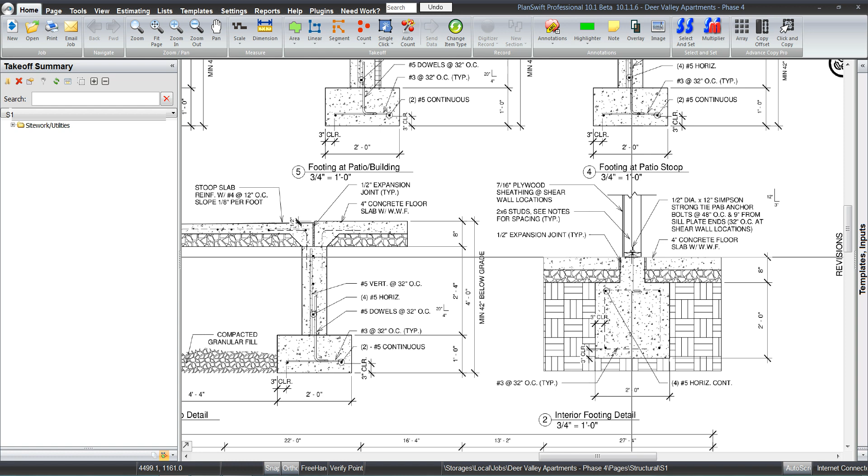So I thought we'd go ahead and go through this one for those of you who have just started out with PlanSwift or just got the plugin. There's quite a few of you, I know, so we'll just go ahead and start with that.

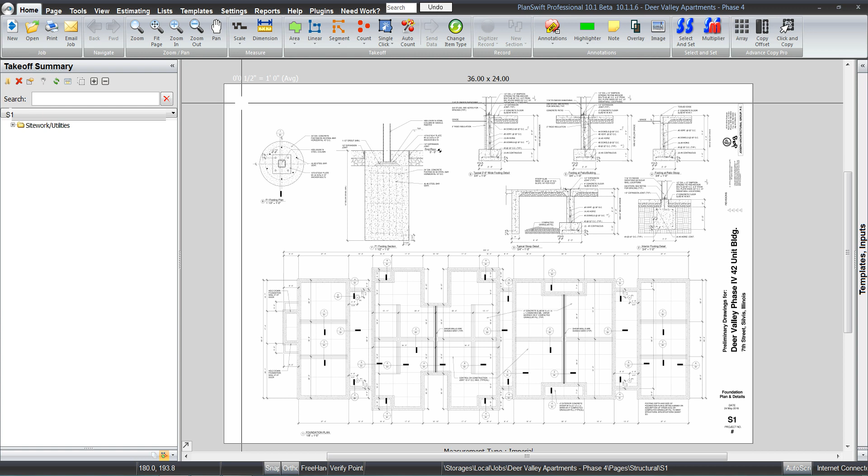I already did some work on this, the site work and utility stuff, but I took it out of the job folder and everything so we're just going to pretend like this folder is not even there. So just like we're starting a brand new job, we got to go to the estimating tab and drag in the job folder, and just hit OK. Obviously, we can always change that.

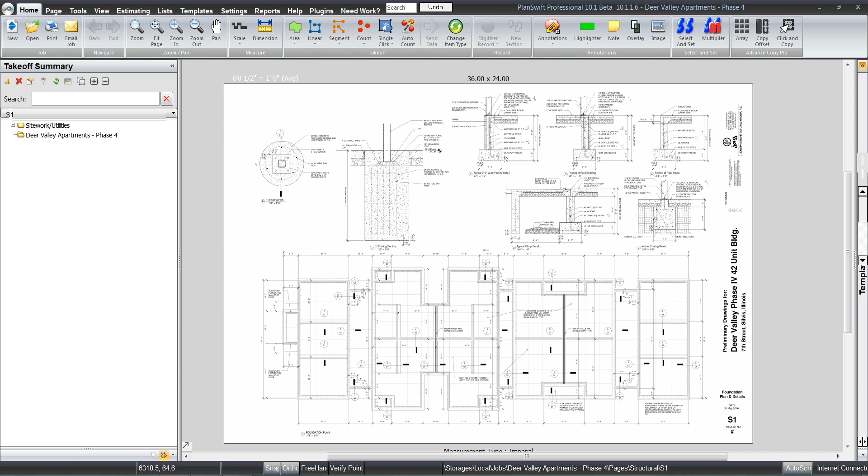And after we drag that in, we can go back to the home tab because now everything goes inside of there anyway. So set up your folders the way you want, however you want to break things up.

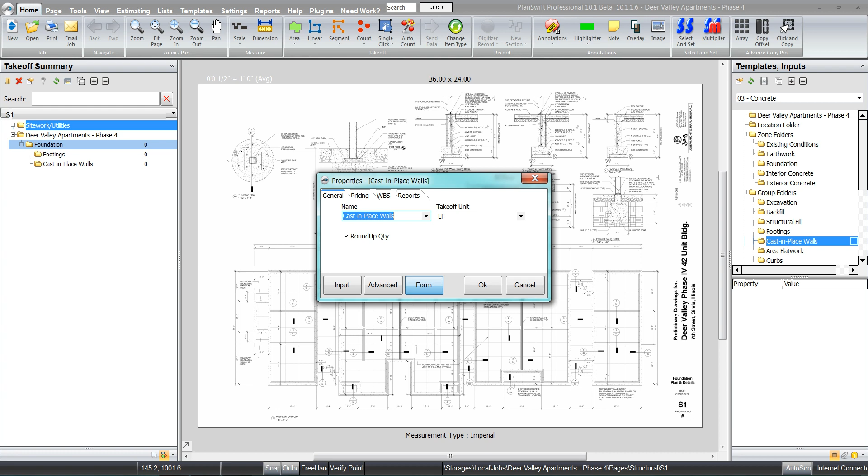And one more for the walls. Okay, so got that done. We're ready to get started here.

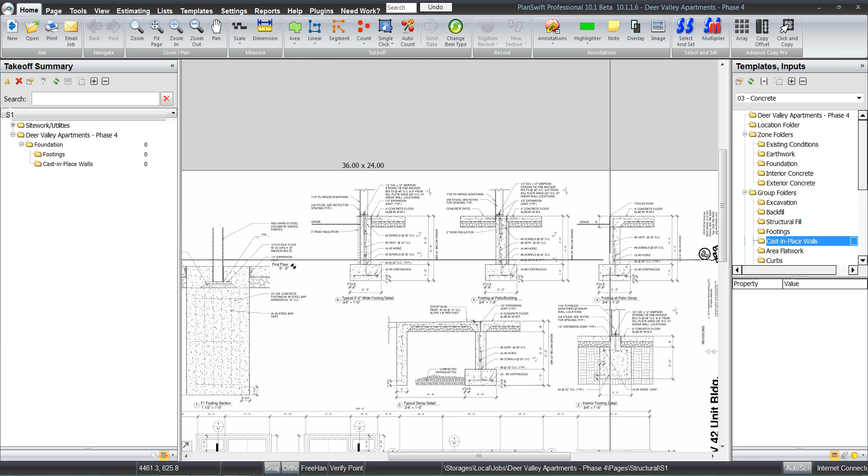Let's see. Looks like 4, 5. Looks like it's actually broke up there. You got that, and then you got like a breezeway in between there. What's the difference between 4 and 5 here? The height of the wall. That's about it.

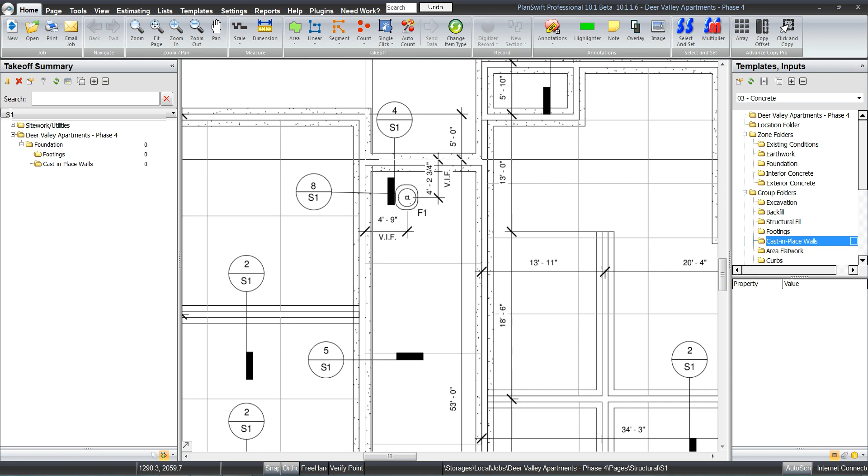So what I'm going to do is I'm actually going to digitize these number 4 walls, which are 8 inches shorter, separately, so I don't have to come back in and do block outs for them to knock that concrete back out. I know a lot of you have told me that you'll just consider it a 3 foot wall and leave the concrete in there, and it's just a little room to maneuver for you, I guess. So if you want to do that, that's fine. I'm actually going to break it up individually here.

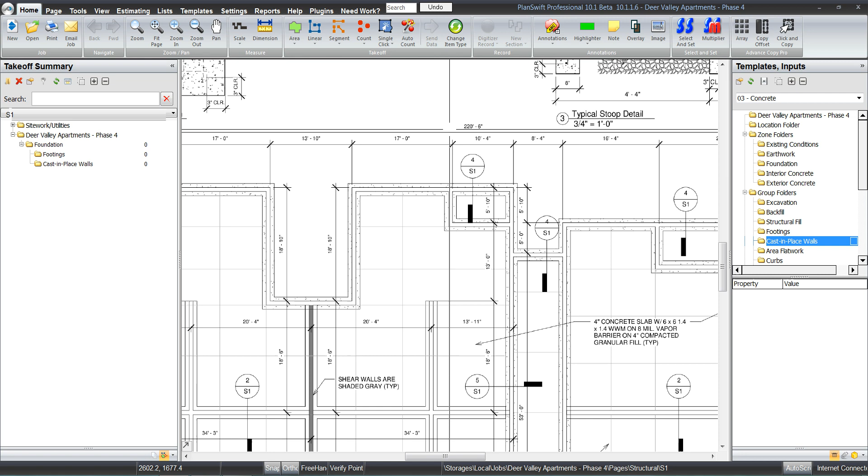So yeah, basically this piece will be separate. Then I'm going to have 2 shorter walls there. Then we'll have another taller wall going around here, it looks like, right to here again. So we'll break it here again, have a couple shorter walls there for that breezeway. And then we'll go to that taller wall again there, it looks like. Yep, and down here, and again back to the taller wall out there and the breezeway there.

So let's drag in our wall first. The reason I do the wall first is that's generally the dimensions on the drawing. You rarely ever see dimensions to the outside of the footing or something, so those are the measurements we have. Plus the footing is 90% of the time centered on the wall.

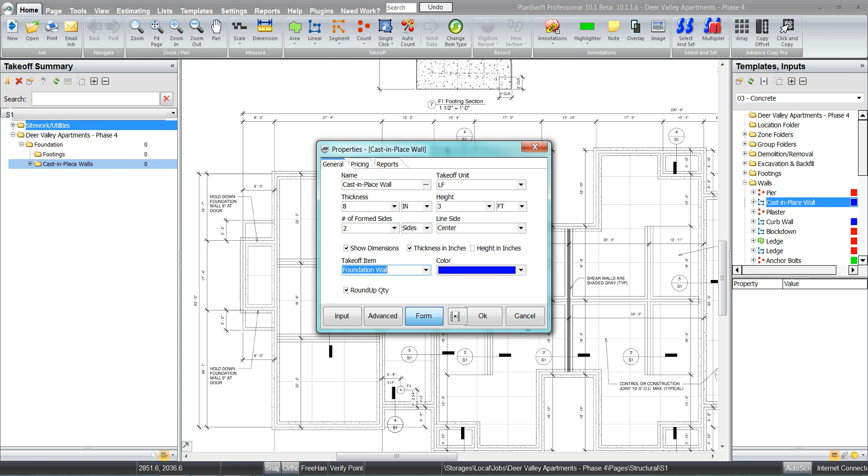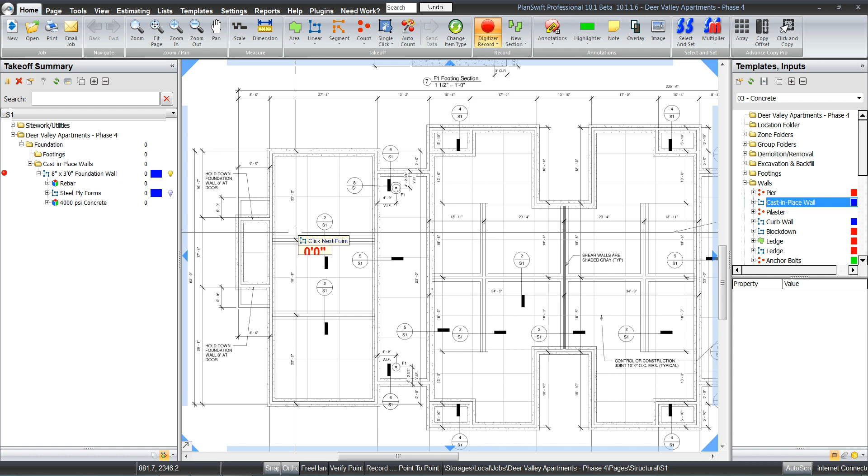And I'll show you when we do the footing how that's going to save us some time. So we drag in the wall, and here's the inputs that we need: 8 inches, 3 foot, form both sides, name it here, let's call it foundation wall. I'm going to come back and do the rebar after I digitize it. I generally bring it in, fill that out, and then digitize and worry about details after. So I'm going to go ahead and draw a couple of these walls out here, just this 3 foot one, not the other one, and be right back with you.

All right, I got the walls drawn out, and now we're gonna worry about the details here as far as the bar and things like that. So we'll go up here and just take a look at it. Right away we got four number 5 horizontals, and let's see, all right, so we're gonna have some number 5 uprights.

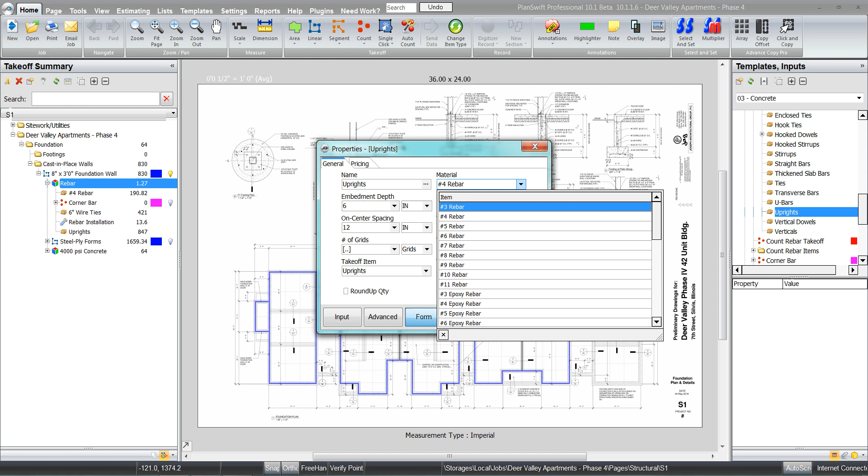So we'll go to our reinforcing folder here and grab those uprights, number 5, 32, and those will be that there. Whoops, wrong one. How about that one? And number of grids 1, perfect.

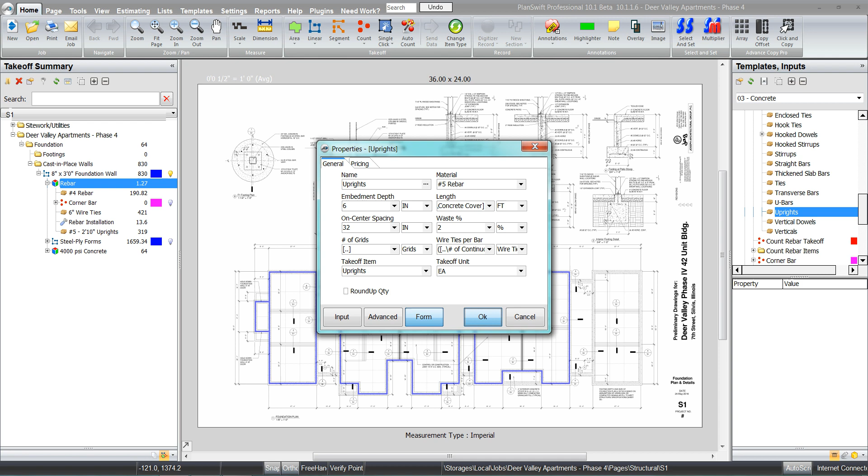And for number 5, these are the horizontal bars, we'll change that to 5. And the corner bars there, I'll go through and digitize them. You digitize where you've got corner bars - you click it once at each corner, it'll put one bar in for every continuous bar that you have. We entered 4, so I'm just going to click once on each corner, and it'll put 4 in there for every time I click.

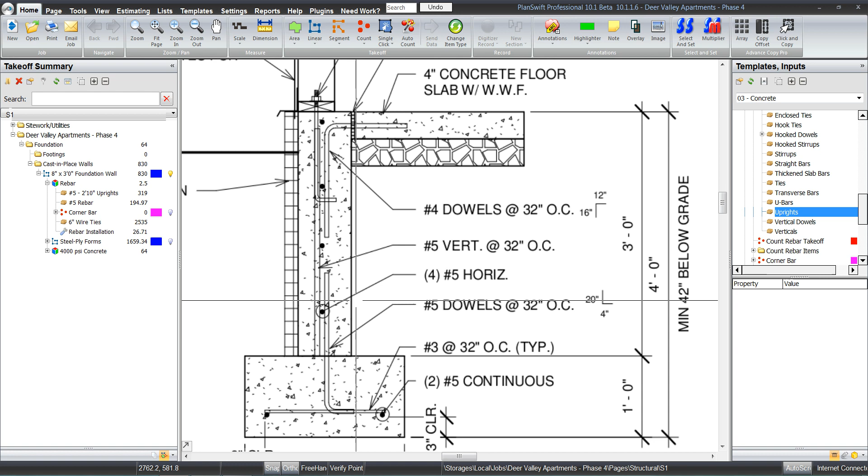So what else did we have here? Number 4, 16 by 12, 32 on center.

I'm going to put them in there, but I don't know anybody that's going to drill a hole in their form like that for an apartment complex building. But we will put them in.

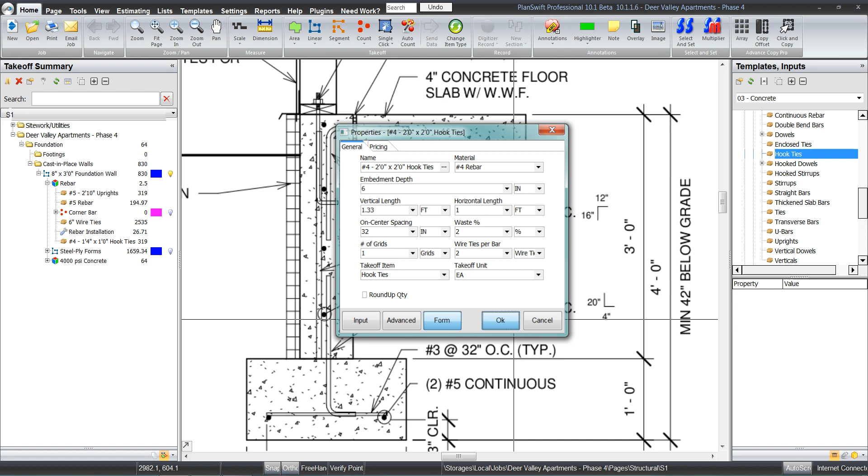All right, so we got number 4, 16 by 12, and what was it? 32 on center. Good, all right, so we got those.

All right, that's it for the bar. That's it there. The forming I don't have to worry about - it's really straightforward, forming 2 sides, nothing out of the ordinary on this, so I'm not going to worry about that at all.

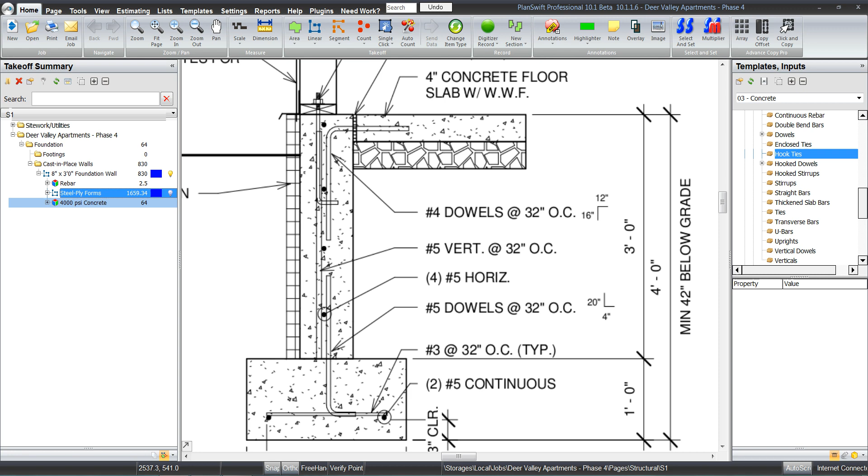Let's see, we're going to have - we got 830, we're going to have a little over 1,000. They're going to have to do 3 - I'm going to make it 2. So I'm going to do 2 pours with a pump.

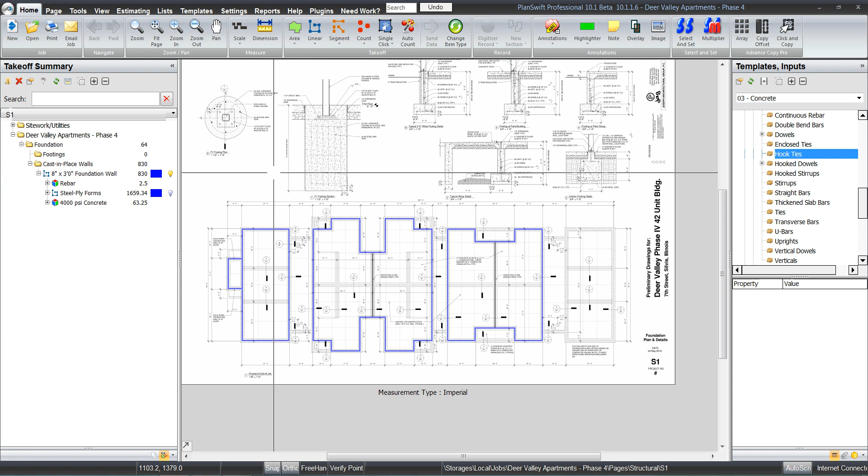And the reason I say we're going to have 1,000 - you notice I did not digitize that one. Once we get some more stuff filled in here, I will show you why I did not digitize that one.

And let's throw our anchor bolts in there. And shear walls - yeah, I'm just going to go 32 on center.

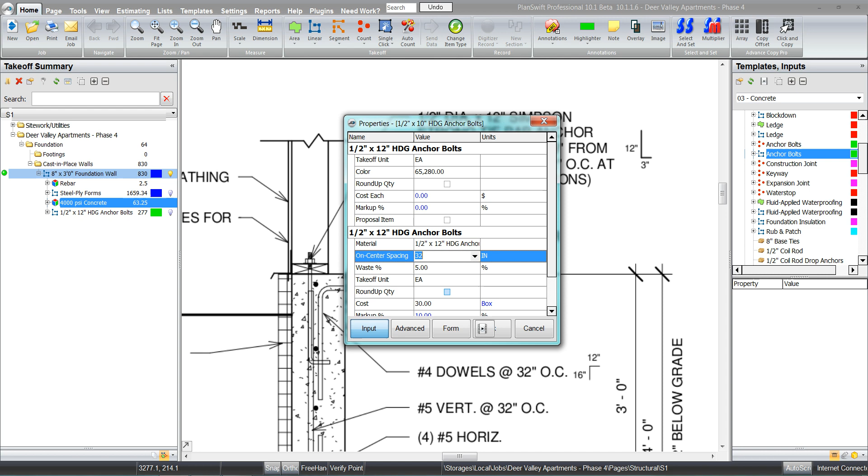Where are we at? There we go. All right, so half by 12, and on center spacing 32, and we'll hit OK.

And obviously we're not going to have to digitize that. I'll check out that detail later - there might not be much for shear walls on this. I might just move it to 48, but I'll worry about that later.

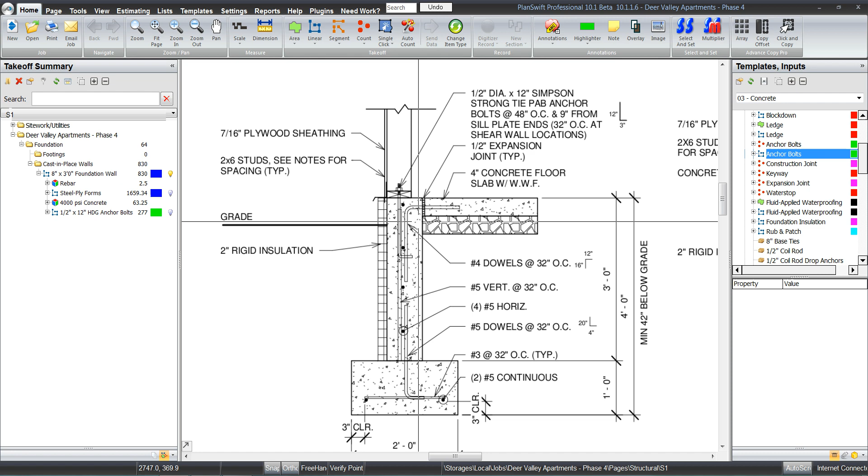And that should be it for the wall. I can't imagine they're actually putting this insulation on the outside - that's a waste of some good insulation. So I'm going to leave that out for now and actually check with them on that. So that's it for that wall - we got that all taken care of.

Now what I'm going to do is come back, and actually duplicate this wall, because I'm sure most of the inputs are going to be similar. So I'm down 8 inches, so I'm going to be 2'4". I'm just going to change the color here so I can see it differently, and I'll just call this like a stoop wall.

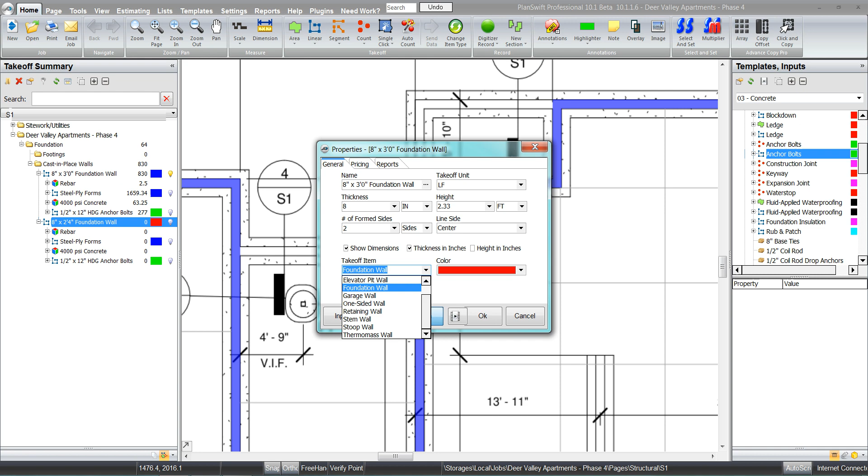So yeah, I'll come back and worry about the details. I know right away I can delete that because it's going to get concrete poured over the whole thing anyway. And I know right away I can change this to 1.

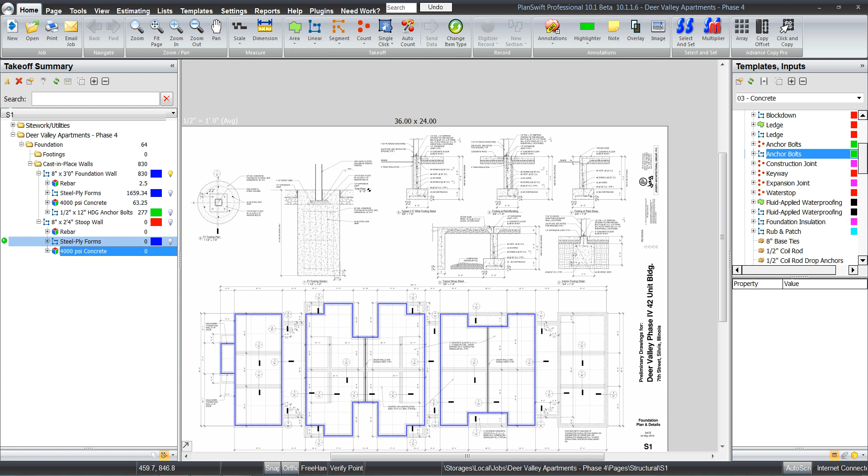That's going to give us a total of 3 pours on the foundations, which with a little over 1,000 feet, it's going to be 1,000 plus whatever these walls come up to. So that's about what these guys are going to pour at a time. So I'm going to go through, digitize these walls, and I'll be right back with you.

All right, we got those stoop walls put in now. Now let's worry about the details here and see what's different, see what we got to change. We still have 4 number 5 horizontals, still have number 5 verticals at 32. Actually they're going to remain the same because they're going to stick out the top there to tie in.

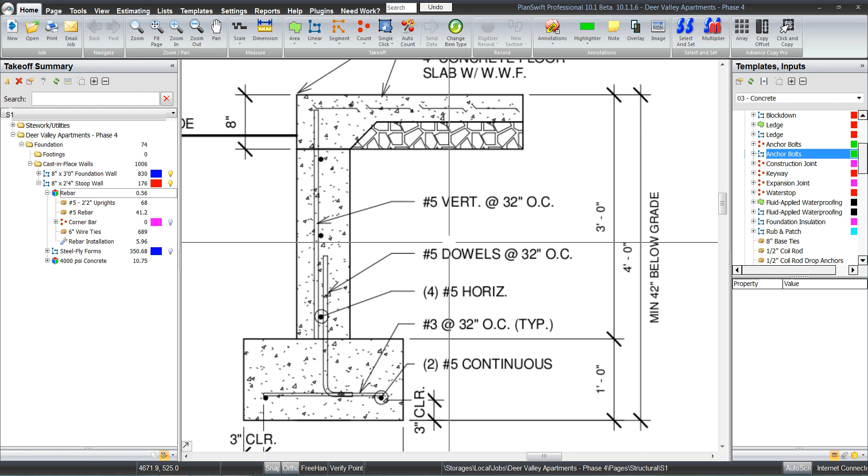So I guess the only thing we don't have is those hook ties there, so we'll delete those. Yeah, everything else is going to be the same there. I'll pick up the corner bars, and that's actually going to be it for that one. So far, here's what we got.

These two here are trench footings. I'm probably going to end up doing them just as a poured wall, because by the time you excavate there anyway, you're gonna have a hard time doing a trench footing. So yeah, this is what we got here. And again, I got nothing over there, we'll cover that later.

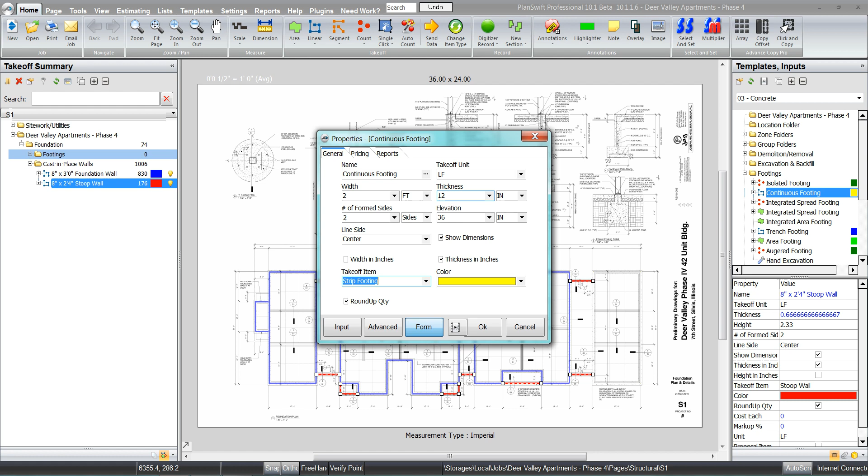So we're ready to do the footing, and on this one we're very fortunate - our footing centered on the wall again, so that's going to make this footing really easy for us. So we'll just go to our continuous footing, drop it in there, and we were 2 by 1, and just going to rename it. Actually, that's right, so yeah, we're good to go. I hit OK, and it's ready to digitize.

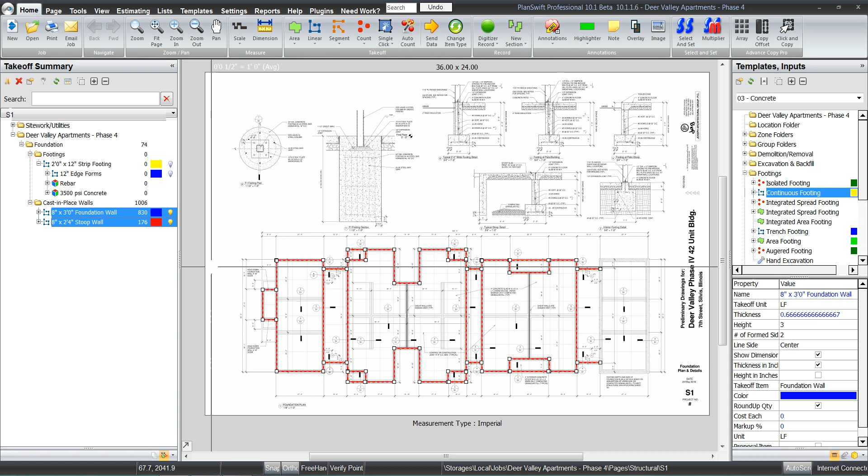I'm not going to digitize anything though. What I'm going to do is turn the light bulb on both the foundation wall and the stoop wall, and select both of them at the same time. Zoom in and just right click and copy. I'm going to go click on my footing, right click, and paste it as a sub item. And I'm going to click yes here because I do want to copy the digitizer points.

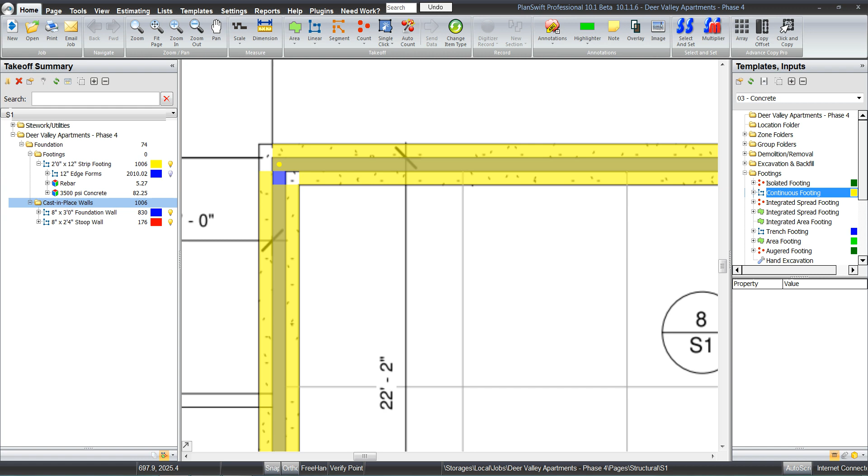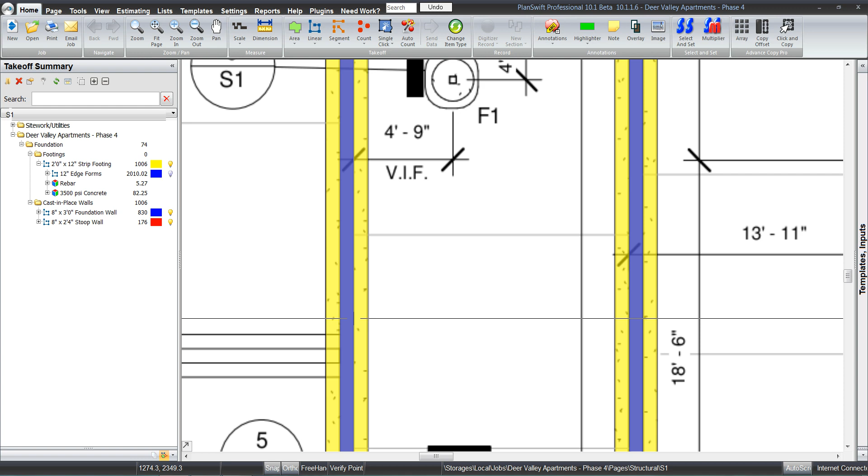Now one more time, I'm just going to hit that footing. I'm going to send it to the back. I can see the wall in front on top of it. So that quickly, we got that footing done now. The only thing we got to do is clean up the ends, move them around just a little bit. That's actually going to be really easy to do. So by doing that, by digitizing the center, you're able to use that same linear, because the center of this footing and the center of the wall are the same exact location. So it saved us that much time there doing that.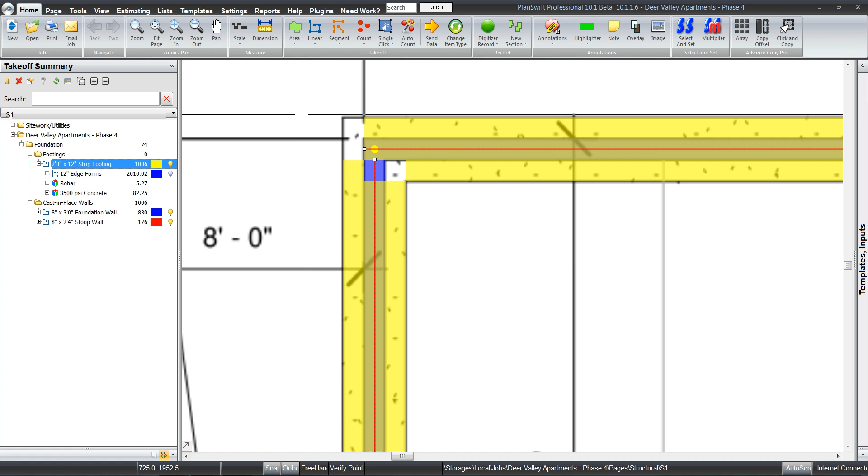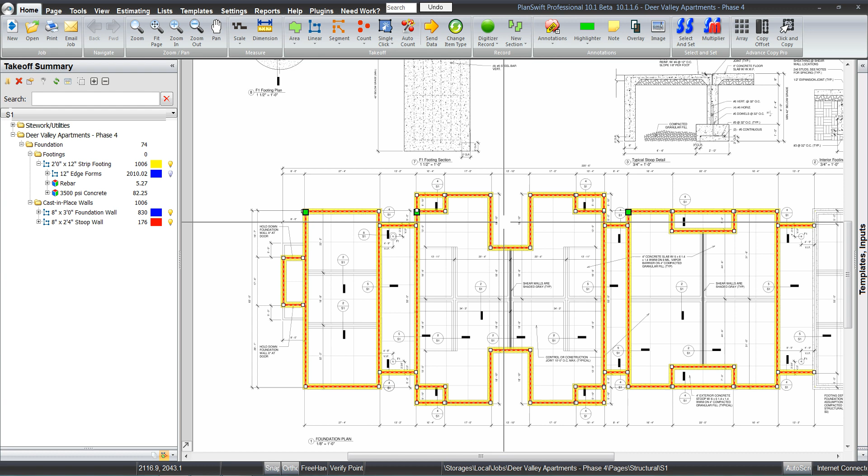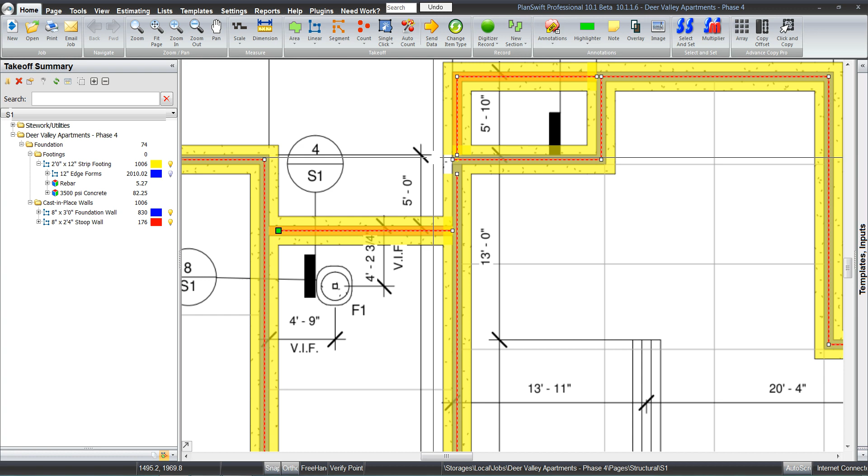We are going to have to move these out. Like I say, the joints and the ends, we're going to have to clean up just a bit, but it's really easy to do. For instance, I can take those 3 all at the same time, get them moved over. Let's see, I can get that whole row of them, which is only going to be to here. I can get those. And yeah, we're gonna have with that wall change in there, we're gonna have a handful of them to do, but you see the point. You can move multiple ones at a time, and it saves you a lot of time - instead of moving around, changing them all at once, or even digitizing it all again.

So I'm gonna go through and make these adjustments, and be right back with you again.

Okay, we got the corners there cleaned up. It took about 3 or 4 minutes maybe. But now we got everything lined up where it goes. Certainly a lot faster than drawing it out too.

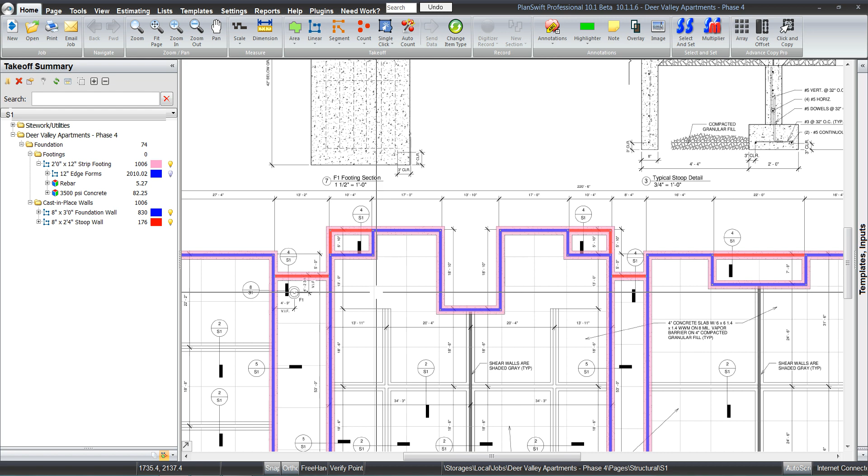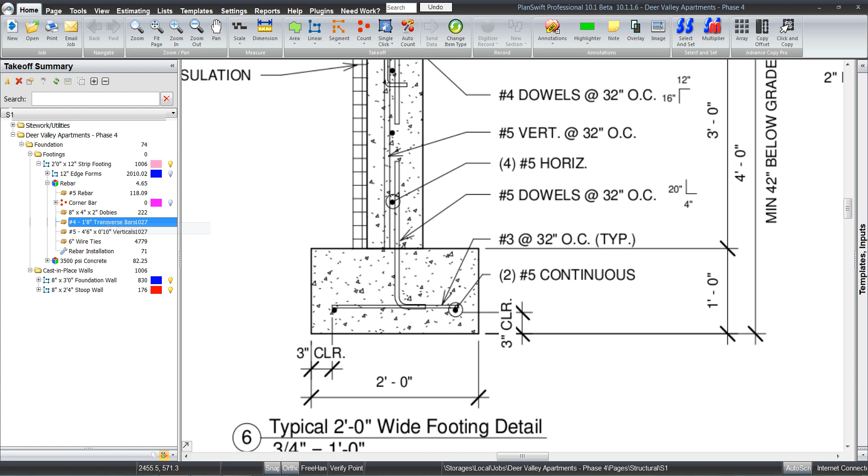So let's move on to, let's get the details for that footing set here. So we're gonna have 2 continuous bar, 2 number 5s, so we're good there. And transverse bar number 3 at 32. Got that. Number of grids is 1. The length of those bars is automatically input, just the width - just taking off the concrete cover on each side for us. And number 5 at 32 on center.

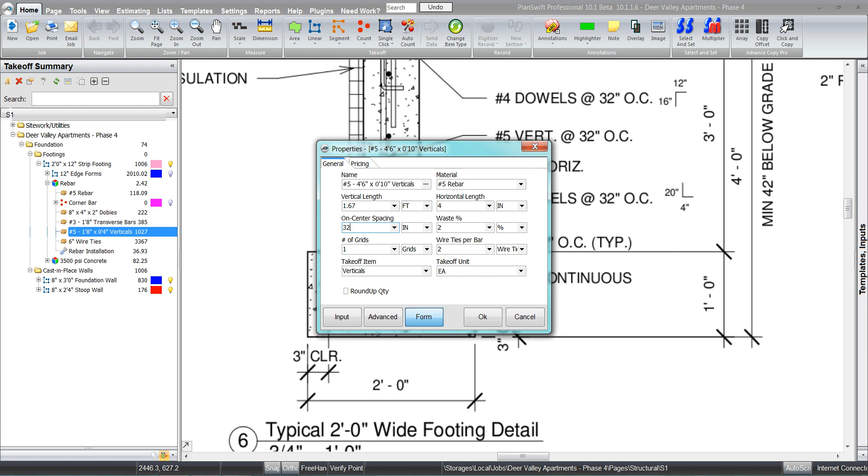Let's see, 20 and 4. So 20 by 4, again at 32 on center, number 5s. And that's it for the footing. Yep, that's done. Except for the number of pours - say 3 for now. Alright, so we got that.

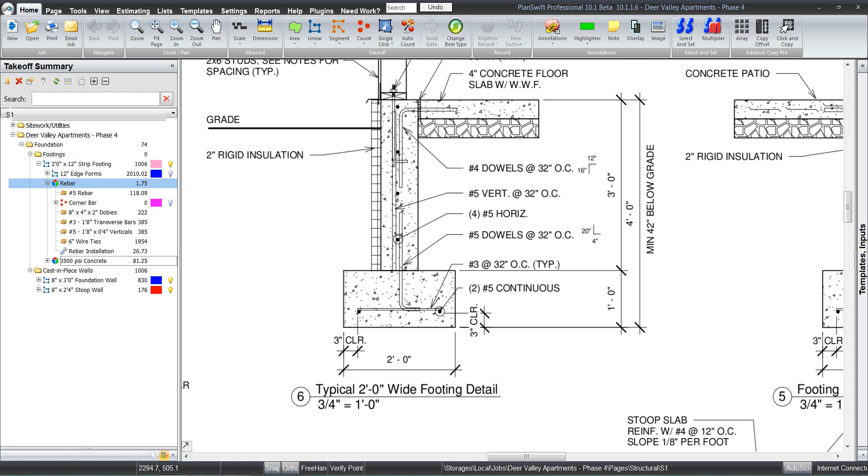Now the one thing we don't have is the corner bar for the footings. While I was moving those footings, I did the corner bar on the stoop walls there. So now, essentially everywhere we got a corner bar in that wall, we're going to have it on the footing too. The only difference is I'm going to copy and paste these, and what I'm going to do is just highlight those just like we did before to get that footing in there.

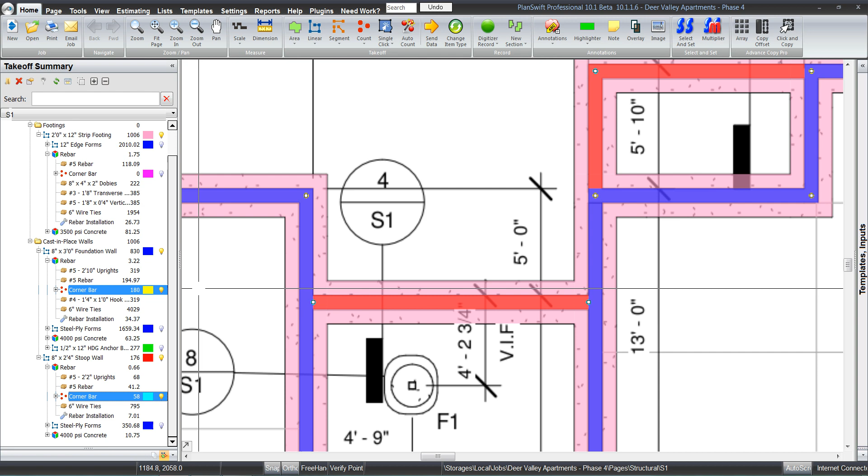So I'm basically just going to highlight all the corner bar in both the walls there. Right click and copy it, come up here to my footing, paste it, copy the digitizer points, and change the color there so we can see it a little better.

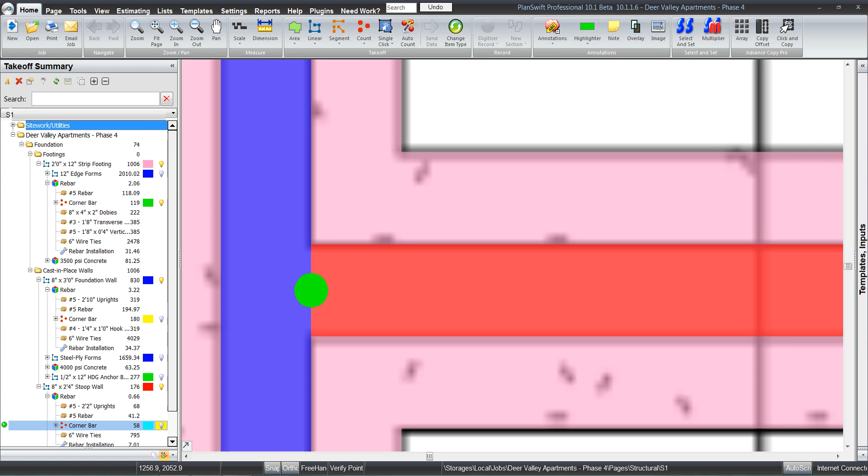I'll turn the corner bars off in the walls. Now we got corner bar in that footing. The only difference is that corner bar for that footing, the edge of that footing's right there, so those could be moved over, but just having them in there is the only thing we need. So we're good to go there. We picked up all those corner bars.

So we're done with that. Now the footing's completely done. Let's refresh it here. Yep, that's it there on the footing. Let's see, what do we want to do now? Now we got all these interior footings.

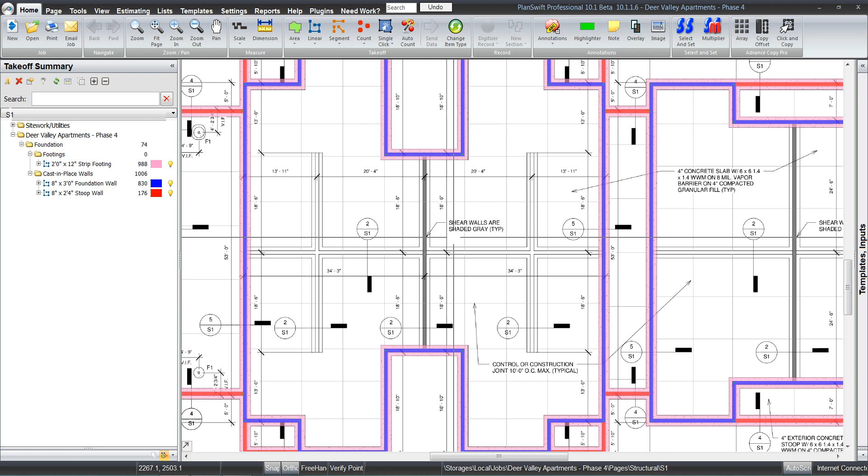Let's see what we got. Looks like 2S1. All of them, just 2S1 of those interiors.

All right, we're going to use the trench footing for this, and I'm just going to do that trench footing. You see it's 2 foot wide, 2 foot deep, and then I'm going to do a curb wall on top. I don't know anybody that's going to form this whole thing up like this at once. That's pretty silly, so they're going to have to shorten up their anchor bolts there or something. Or I guess you could cast them in the footing there and pour your curb wall around it, I guess.

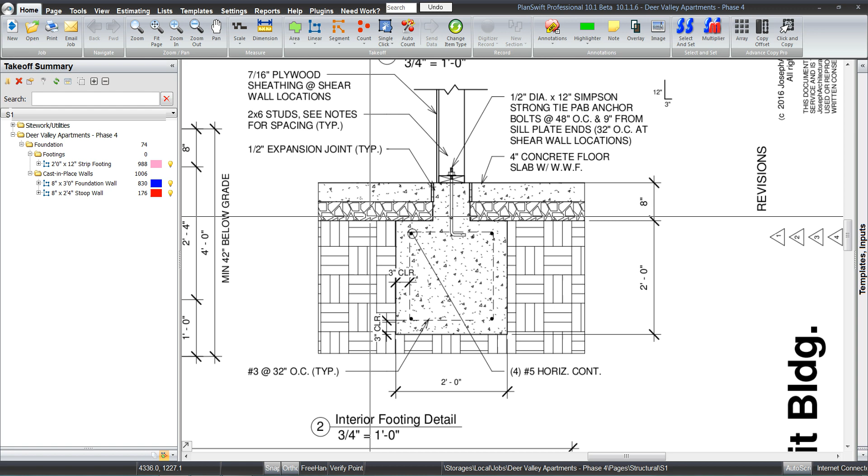So we'll grab our trench footing tool, 2x2. Yeah, that's about it. So we'll drop that in. 2x2. And I'll tell you what, not to confuse anybody, I'm going to set them at 0. That's for some overdig, because you're never going to dig that trench footing exactly what it is.

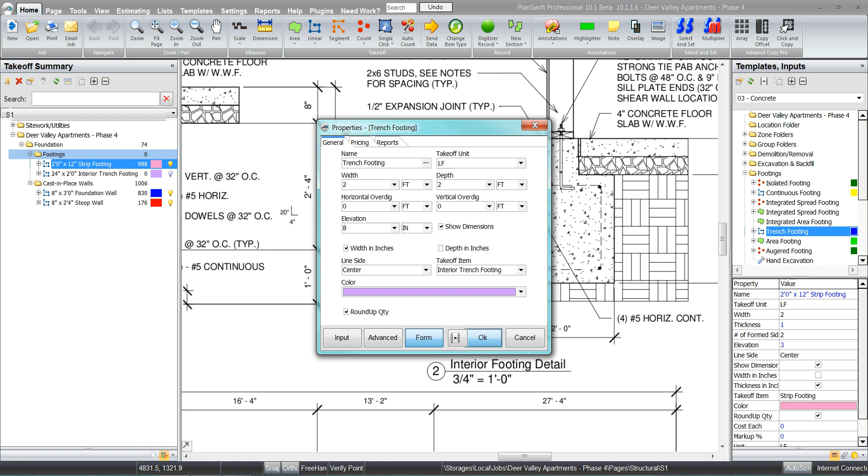So elevation, it is down 8 inches. Center, and I'm just going to rename this one interior trench footing, and change the color here. Again, I'm just going to start digitizing and come back and worry about the details later.

All right, I'm going to draw these out real quick and be back with you again. All right, we got part of those drawn out. I noticed a little pattern here, so you'll see that I left off the one here, I left both of them there, and this one here. So again, the excavation fills itself in already. The depth, because we told it the elevation, it knows how deep it is. It makes the calculations for us there, so we don't have to worry about that.

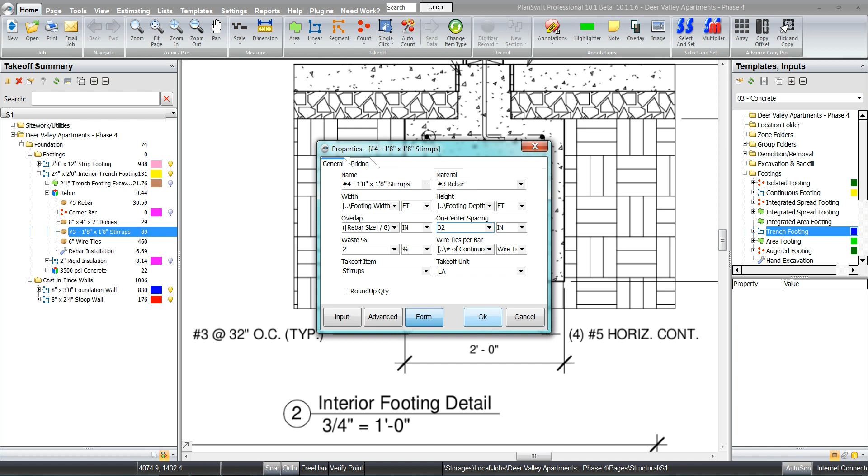So let's get our rebar set. Okay. So again, we got four number 5s. Got those. And we got number 3 stirrups at 32. Okay. Got those, got that.

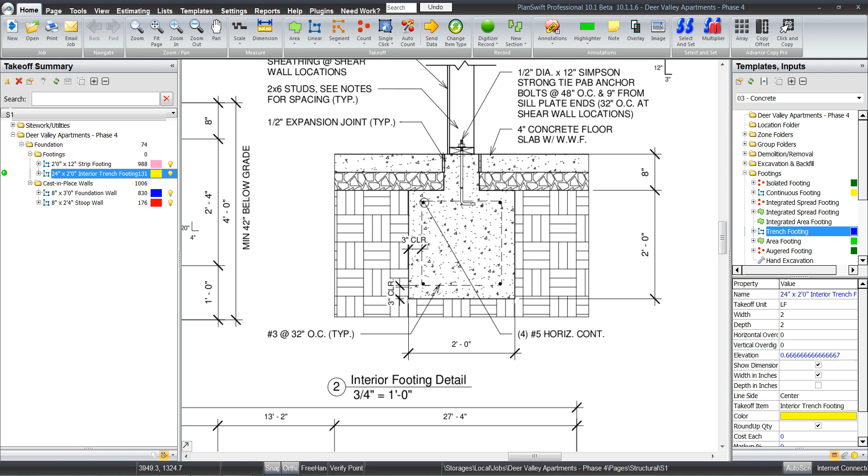And I'm just going to delete the insulation because we don't have it on this one here. And we'll worry about picking up the corner bar here when we're ready. So that's it for the trench footing on those parts there. Let's get this curb wall on top of it there.

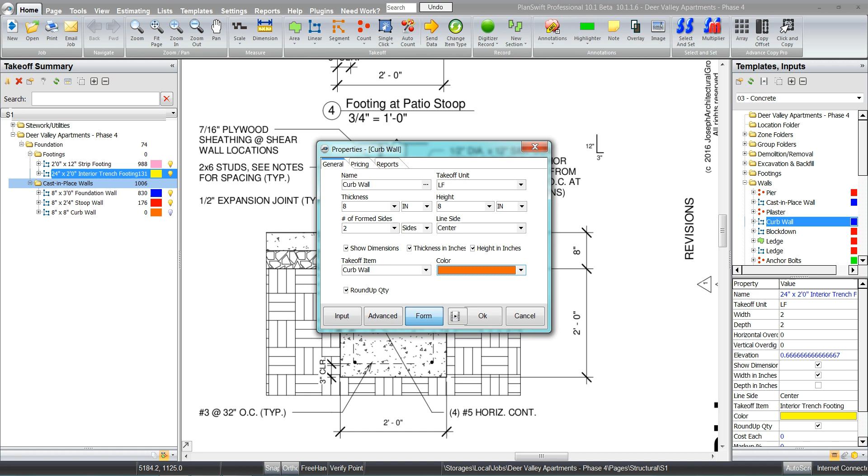And so we're going to be 8-inch by 8-inch. Yeah. So we'll just take our curb wall here. And actually I'm going to separate that out because that's going to add that curb wall into the footage of the wall, which I'll get that later there though. So we're going to be 8-inch by 8-inch, 2 form sides, going down the center again. Curb wall, and let's change the color here so we can see it a little bit better. And that's it, so we'll hit OK.

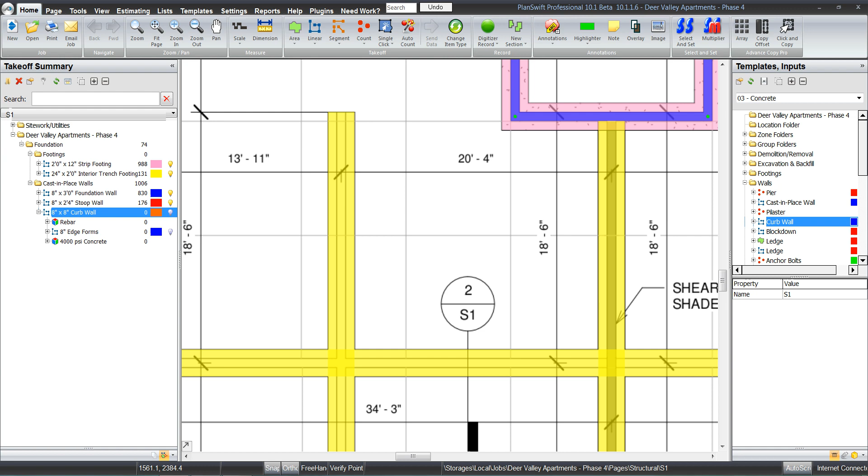And again, I'm going to shut it off, and I'm going to click on that trench footing. Right click and copy, and paste a sub item. Yes. You'll see that. But the only thing is, I ran the footings through each other because the bar is going to have to run through it anyway. You're getting a little concrete, but it's not much. It's not going to hurt us.

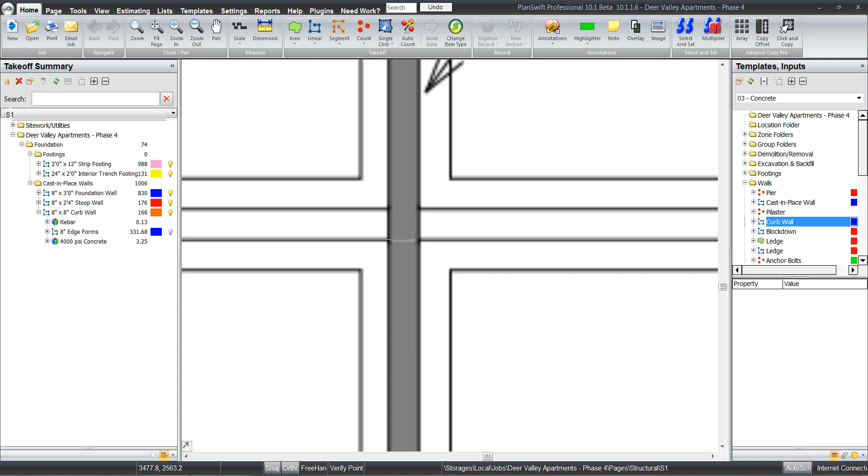The curb wall did the same thing since the footing did. And again, I got 2 of them there, or 3. I mean, I'm only going to have that happen 4 times, and it's 8-inch by 8-inch, so I'm not concerned about that. But there we got the curb wall on top of there. They don't show anything in it, but I'm going to throw one number 5 in there.

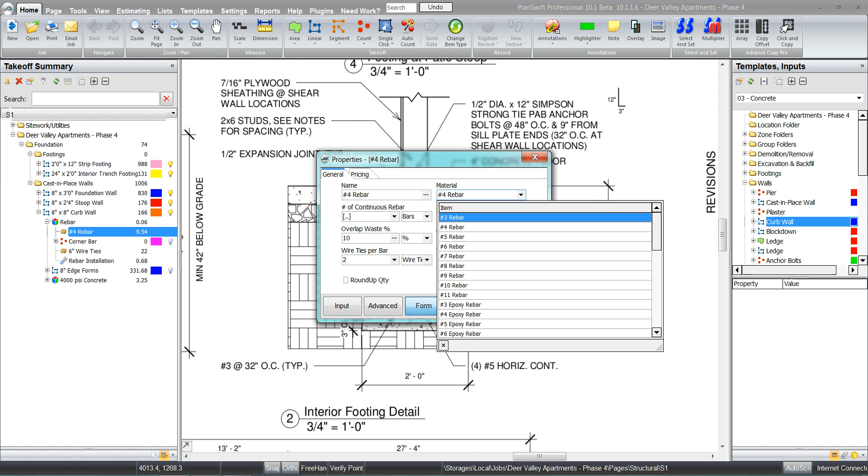Okay, we only got 2 shear walls, so that was where the anchor bolts were 32. So we're gonna have to do our anchor bolts. We're actually gonna have to digitize them out. So again, we'll drop them in. Only the spacing is different.

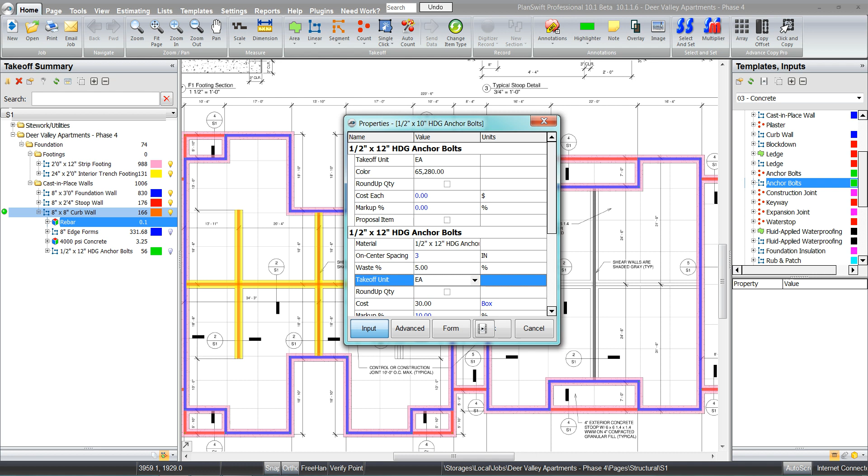I don't know, I'm gonna have to look at that. That's not showing up right, but maybe it doesn't mean it's not working, I guess. So again, that's the only one I'm going to digitize there.

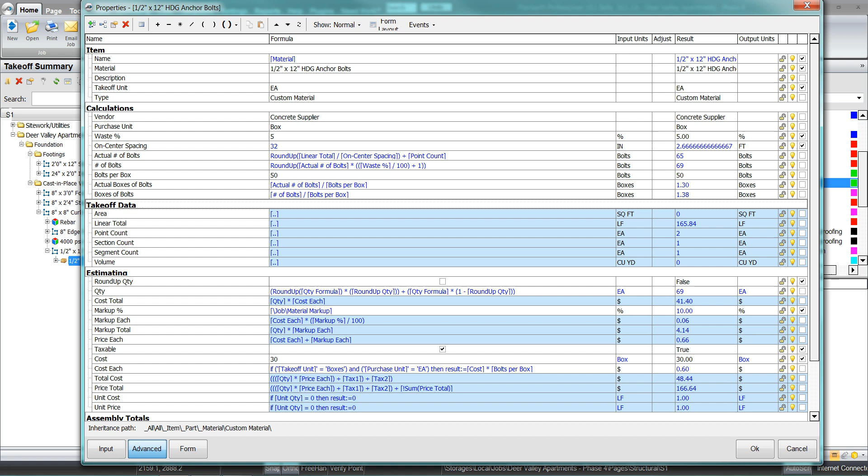Huh, that ain't right. I suppose all of you got that too, so we'll have to go through and fix that.

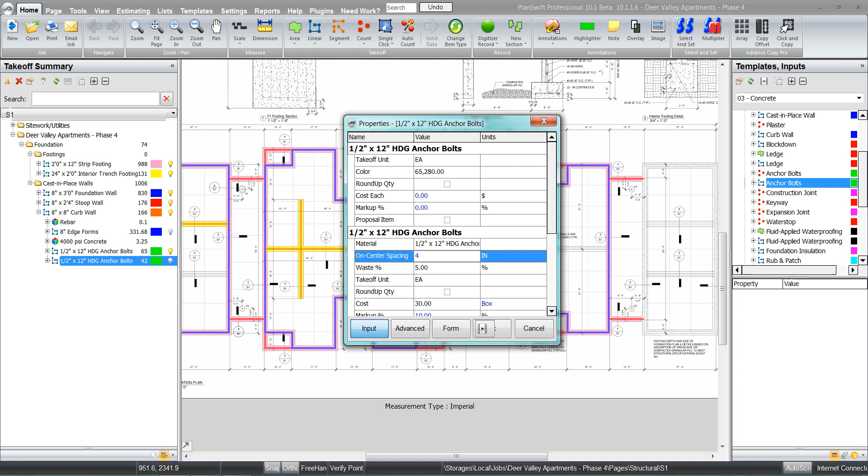So we're going to have the same thing. I'm just going to duplicate that, and these ones are going to be at 48. So I'll hit OK.

And yeah, instead of even digitizing those, again, let's just click on the curb wall and paste them in there. There we go.

All right, so we got those done. That's done. That's done. And that's going to be it for the curb walls and the footings.

So now, why I left those out is because we can take this one, now that we got everything in it, we can copy it down. So I'm just going to highlight the whole thing and tell it I'm going to go down 18.6, and I'm going to do one copy.

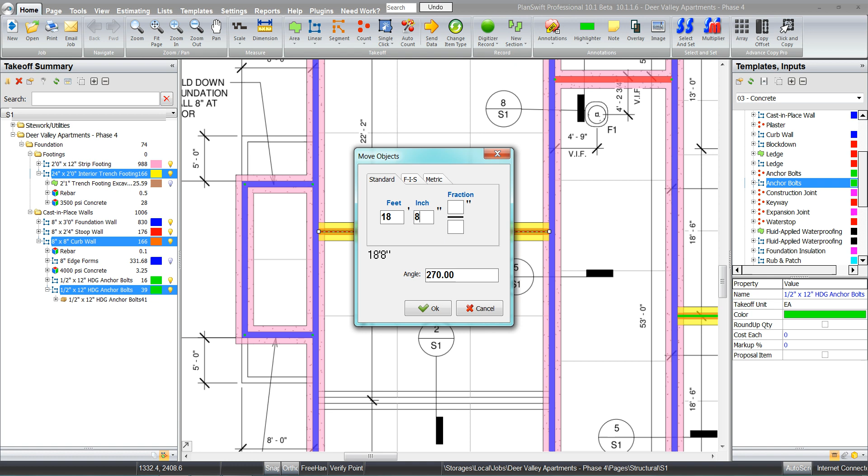And what did I do? I clicked something wrong apparently. Let's try this again here. There we go. I must have hit the tab and put 18 inches.

So we copy that one down because we got everything in it. This one here is identical to this one here. So 40'8" on this one.

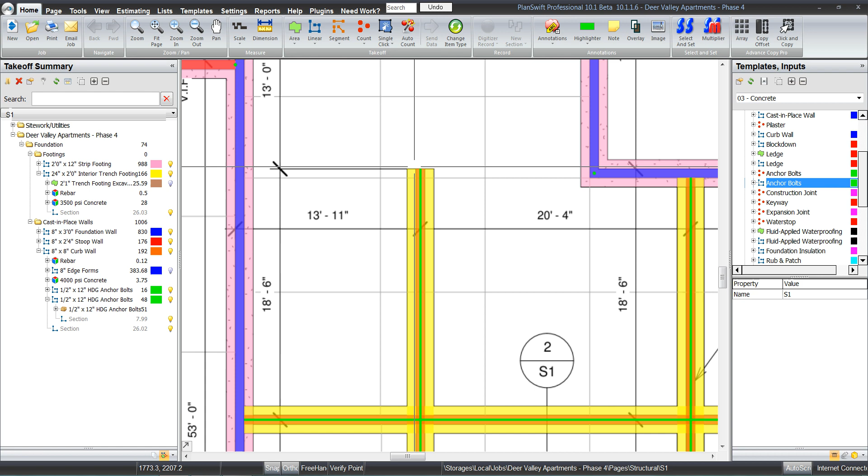And actually, before we do that, actually we don't need corner bar because the bars are going to run through both ways. So let's not worry about the corner bar. So I'll take that one.

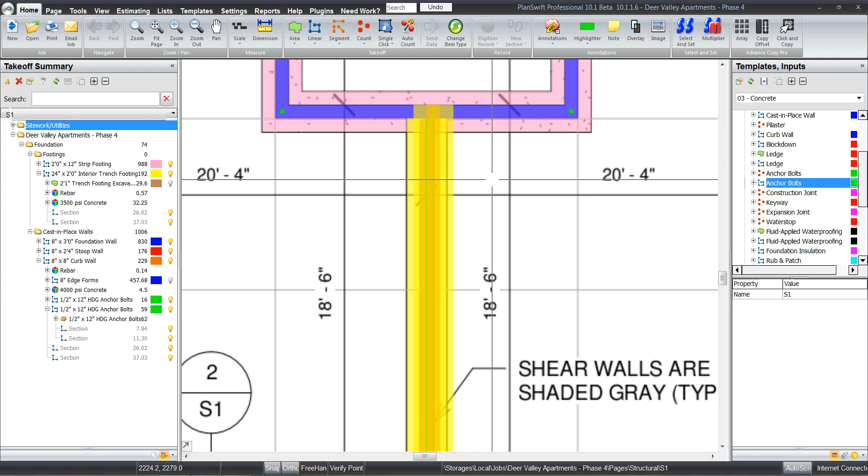Copy. Oh, god damn it. I did 20'8", not 40'8". So if you do it right, it saves you a lot of time, but if you do it like this, it costs you a lot.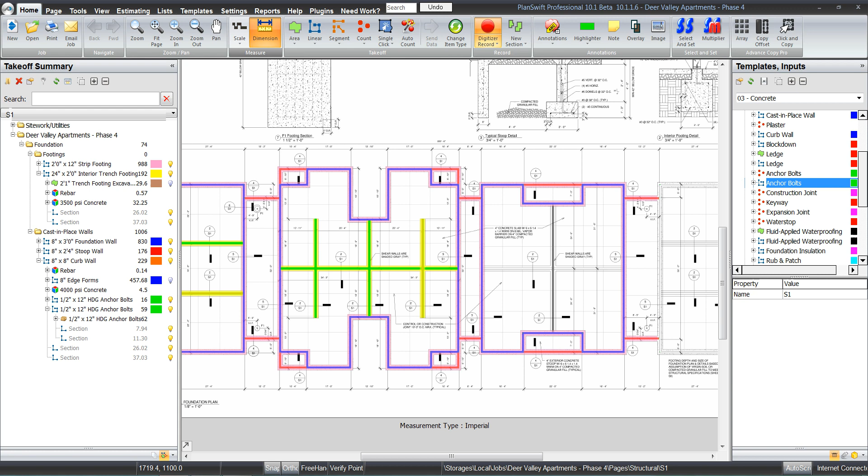But there we go on that one. And now what my plan was here was, just because these aren't the exact same size doesn't mean we can't copy them over. So I'm going to figure out what we need here, which is

7610. So copy that over at 7610, and we'll take this one, and might as well measure. There's no guarantee that's right.

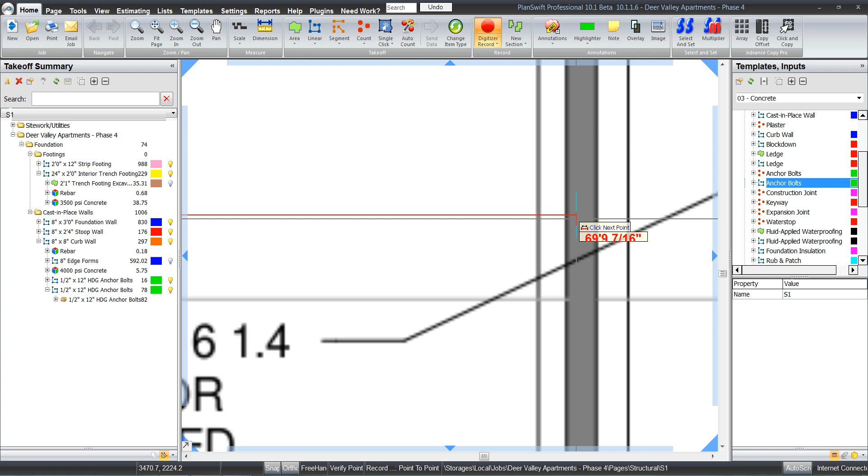No measurement. Probably centered in there, I imagine. Let's find out. 11.6, 11.8. Sure is.

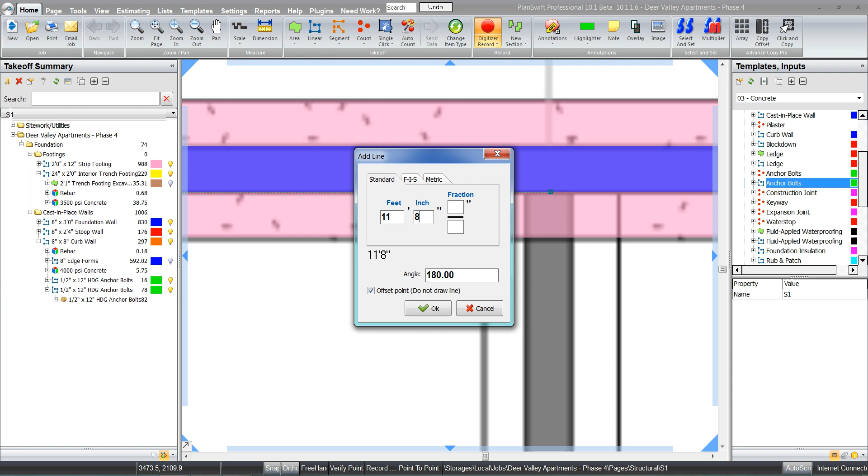So, 6911. Okay, so we copied them over, but they're still not right.

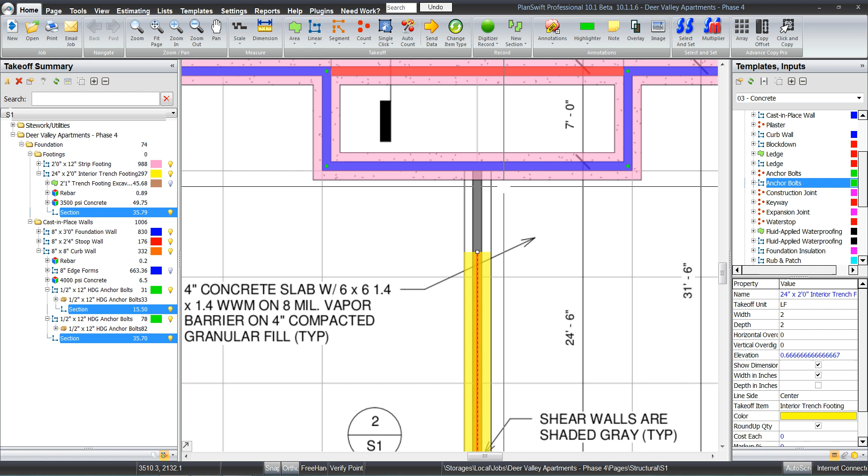So let's just highlight it, and essentially, if we first know the distance, 6 foot there, and 1310. So again, highlight it and just click on that one there.

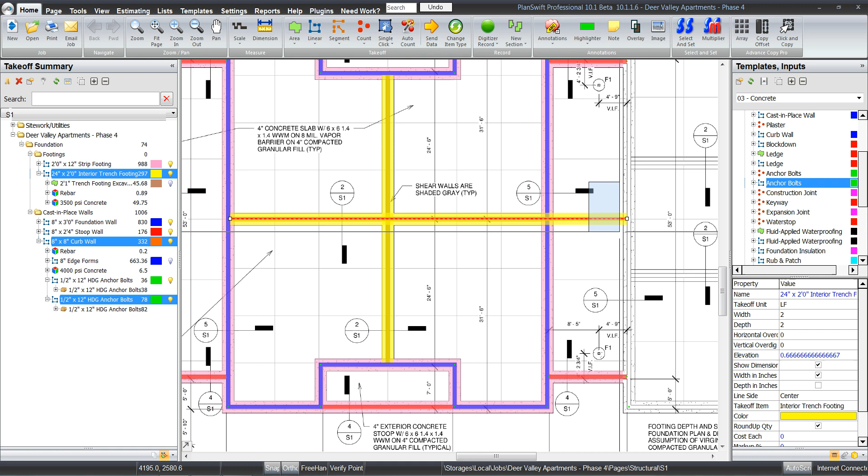Move that up 6. You see that lines right up for us. Same thing here, down 6, and then we'll come over to this one, and 1310, right? Yep. So that's it there.

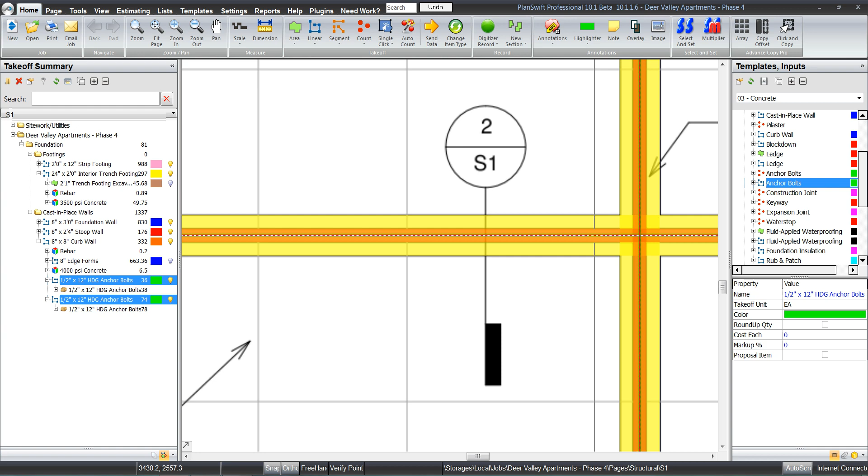And if we reorder the items here, you can see that everything's in the right spot, and so you see the anchor bolts went with it, the curb wall, everything moved at once. And again, instead of drawing it out again, it just saved us some time there.

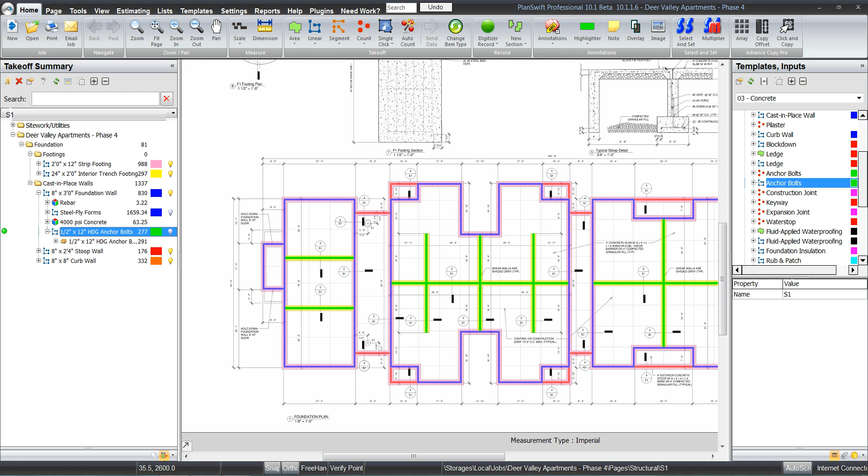So that's it for those interior trench footings, and got the curb wall, and yeah, that takes care of all of that. The only thing I am going to change is I noticed that them shear walls are only on the interior, so I'm going to change this back to 48.

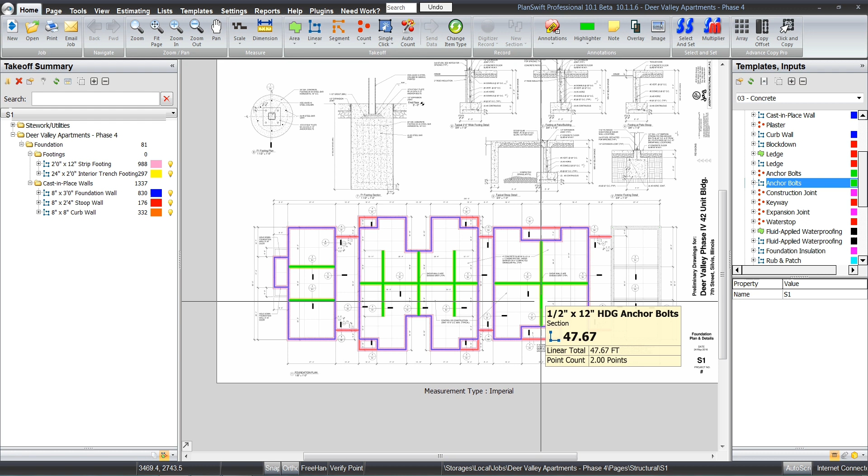So yeah, we got no corner bars in our curb wall because they're going to cross anyway, trench footing the same way. Yeah, so we're all done with all of this here, and yeah, we're ready to do the slab here, aren't we?

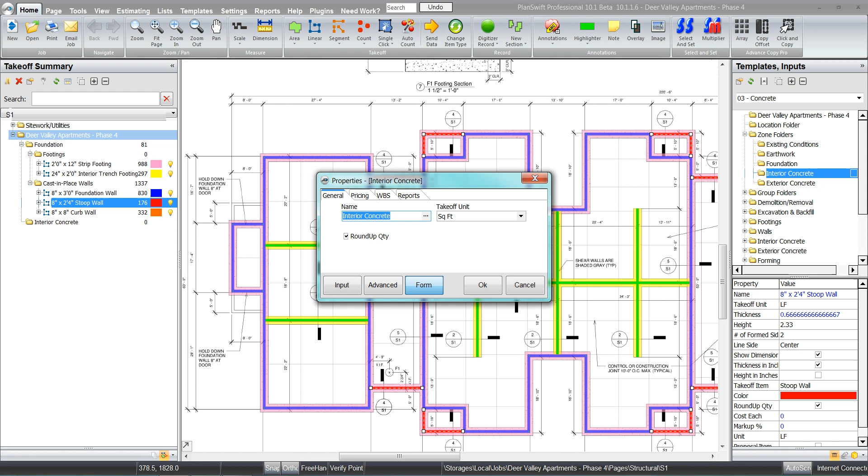Yeah, I'm gonna wait on those. I'm gonna check and see if they want to do them as a board wall. So let's get our interior concrete. And start doing our slab.

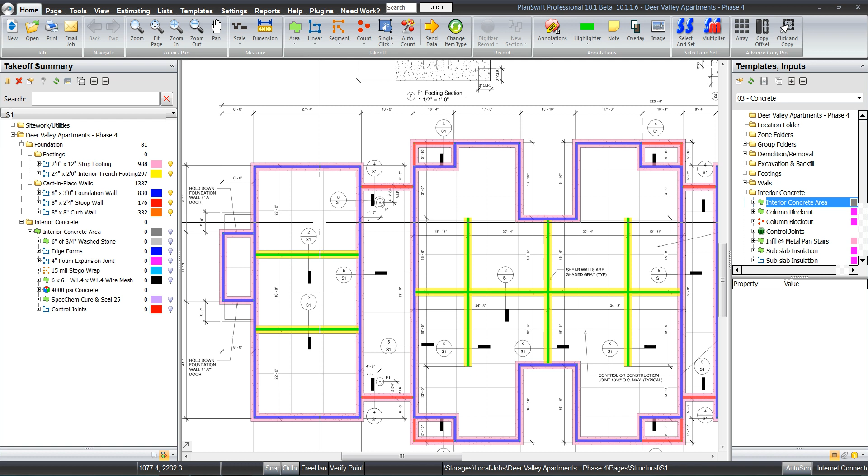Actually, I'll tell you what, I'm going to stop here. I'm going to make the slab a separate video. So, yeah, you'll have to come back to watch the video for the slab to see why I left all this off here. So maybe some of you have already caught on.